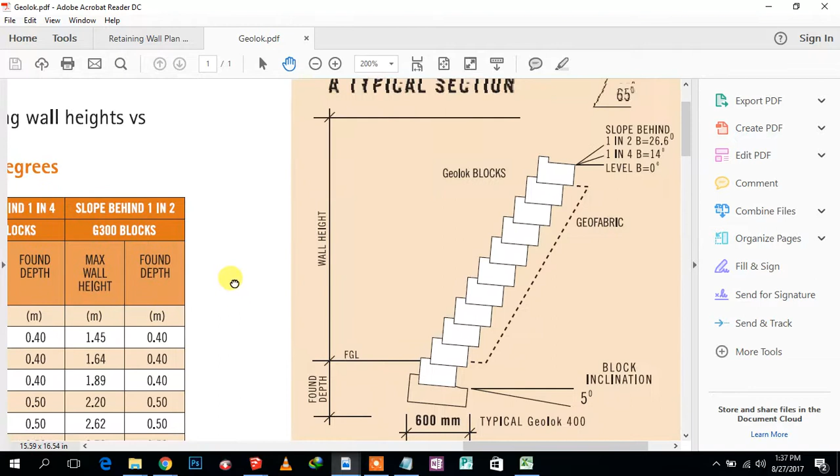So let me take you through the course. What I'm basically going to do is take you first to the manufacturer of the block. They have specifications. Let me just take you to the page.

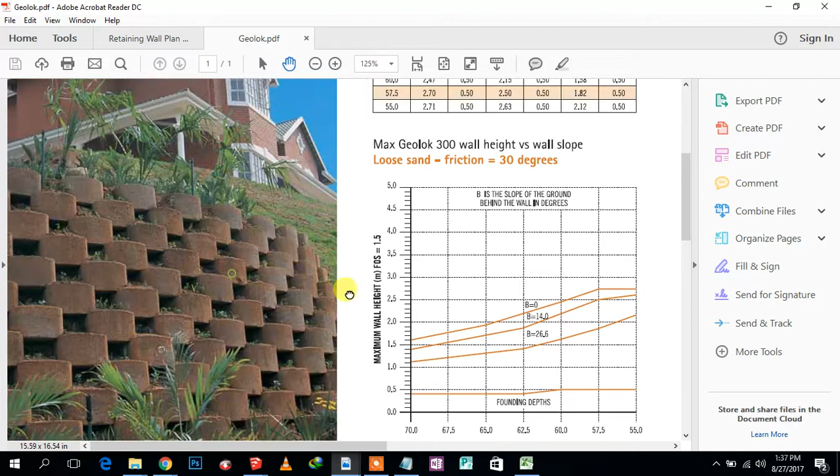First of all, is this picture that you see. What they actually decided to do is begin by showing a portion of a completed wall with the same blocks that we are using. So this is the block you can see in this picture, and the house is there with the green roof. This is somewhere in the estate down in Mount Edgecombe, in that village there, with houses that look similar, particularly the roof color. So then they use the same block.

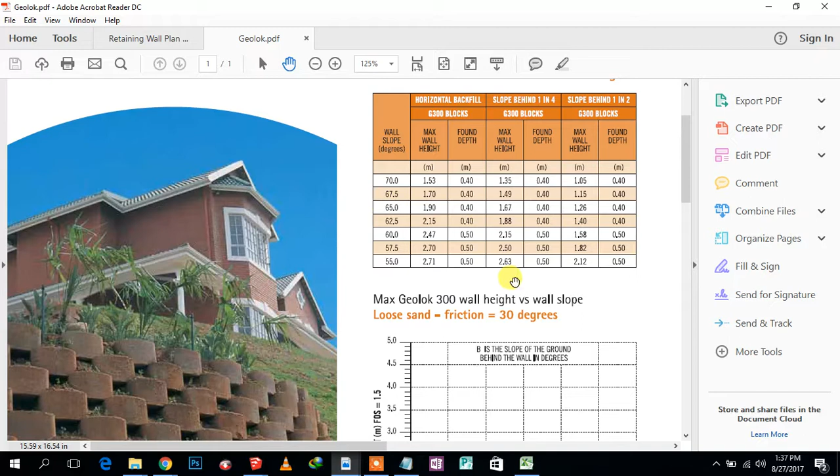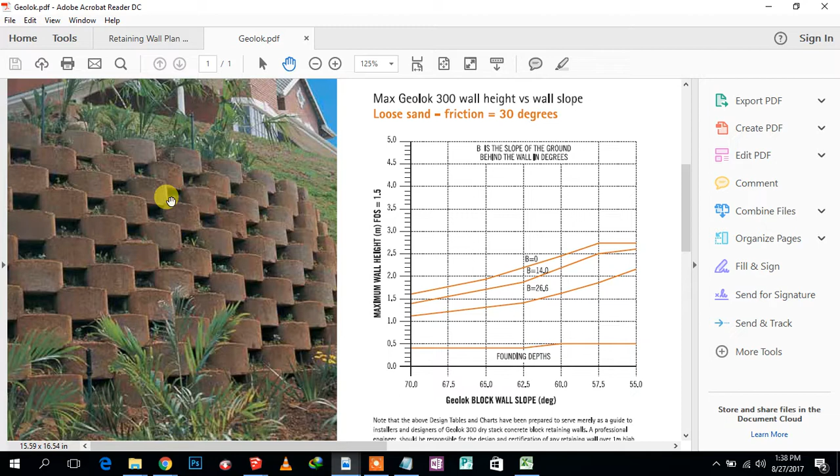You can see that this is the wall, a completed one, with all the inclination into the bank, the Geolok 400. And can you see the greenhouse, the grass, and the plants and all that you might need to do when the wall is completed. So let me take you to the page now with all the technical details.

Number one is the inclination. The inclination here is the wall is going up at 65 degrees. That's the slope of the wall. And there's a Bidim cloth there just behind the wall, which I have on-site already.

Now can you see that the wall, as it goes up, it's not straight, like for instance how this line is being drawn. It's very straight, and look at the wall, and how it's leaning into the bank. So if I were to draw another straight line in front of this one, you could see that it goes at such a sharp angle that a V shape gets formed. It means that land is staying in the air, not benefiting from that land.

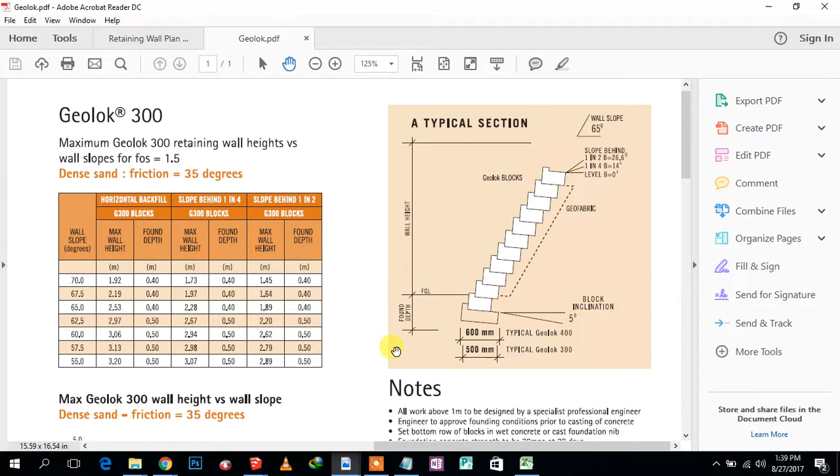So what I've tried to do is come up with another drawing. Let me take you to my own drawings. I wanted to give you a full picture that as a contractor, as a builder handling this project, my ability is to visualize the completion whilst the construction is in progress. So I have already visualized how it's going to look after we've successfully completed the wall.

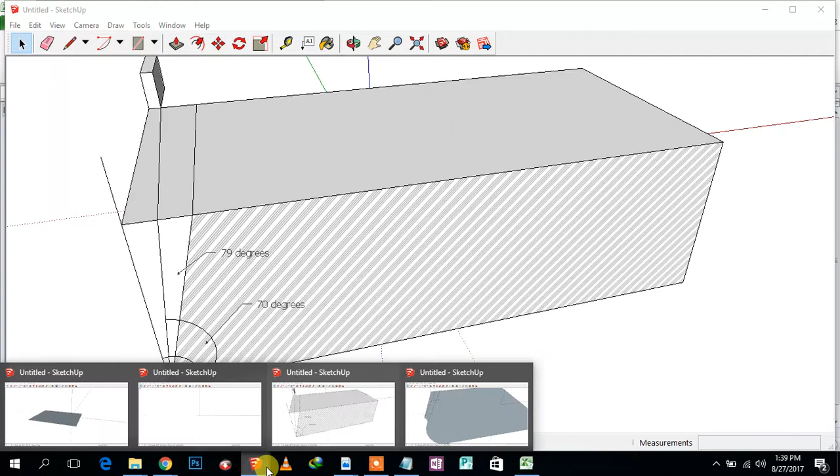Currently, because you emphasized that you don't want to lose any piece of the land, that's where your main concern is. So let me explain this. Can you see the shape of this thing? Let me explain to you what's going on in this drawing here. Let me zoom out, assuming that this is our concrete boundary wall with your neighbor's wall, and this is now the shape of our wall.

We curved in because we couldn't just start on a straight line, so we curved in so we could get enough space, and we could retain part of the bank on a curve. Initially we were going straight, and we were going to end up at this position here, approximately 1.68 meters from this pillar, from this existing wall that's recently been built. So that was going to be a huge V shape.

So what we've done is we've come up with a new design yesterday. We curved the blocks to form this curve again, so there are two curves forming a complete S shape. So basically now we are very far from where we were. We've now gained almost this gap, which is approximately 850 millimeters.

So now as we go up, we're not going to be starting deep into the bank. We're starting a bit forward, close to the neighbor's boundary line. Now I have also done some calculations to show you that. Basically what we have here is the height of the wall — we are going pretty high, 7.5 meters. I think so far, from the deepest point, we've retained about 2.5, if not 3 meters already. So we still need to go about 5 meters up.

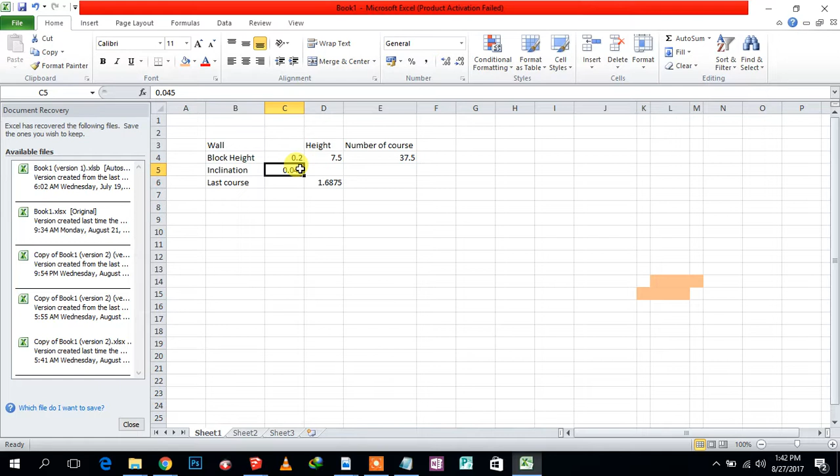So if we are gonna go up 37 courses, and each block is about 60 mils, each time we lay a block we are going 60 mils into the bank. By the time we put the last course, this means we are going to go about 2.25 meters. That's too wide, that's a lot of space that you're going to lose.

But you need to sit back and relax, you don't have to stress about that. What we've done is reduce the lip size to at least 0.045, so that you can be left with at least 1.6.

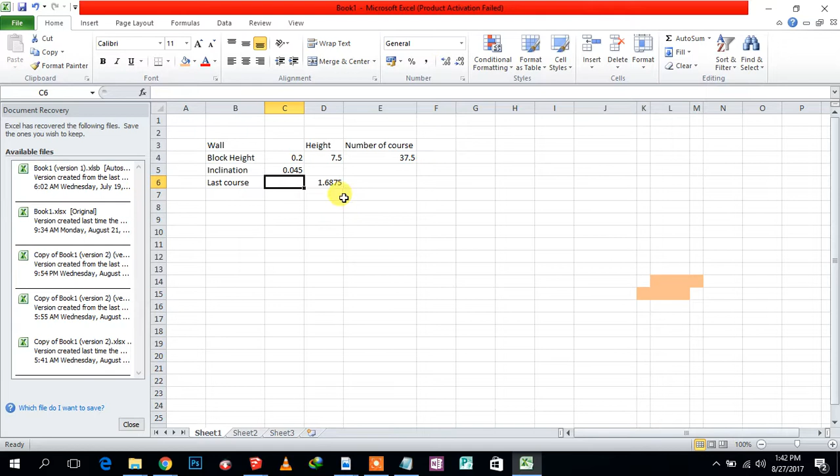Let me take you back to that diagram. Since we've gained this 850 now, it means we are starting from here. So now I have to subtract this 850 from this 1.68, so it's no longer gonna be 1.68 - you might expect to be within a range of 700 mils, or the size of a block only. That is gonna be the V shape between the wall and the retaining wall.

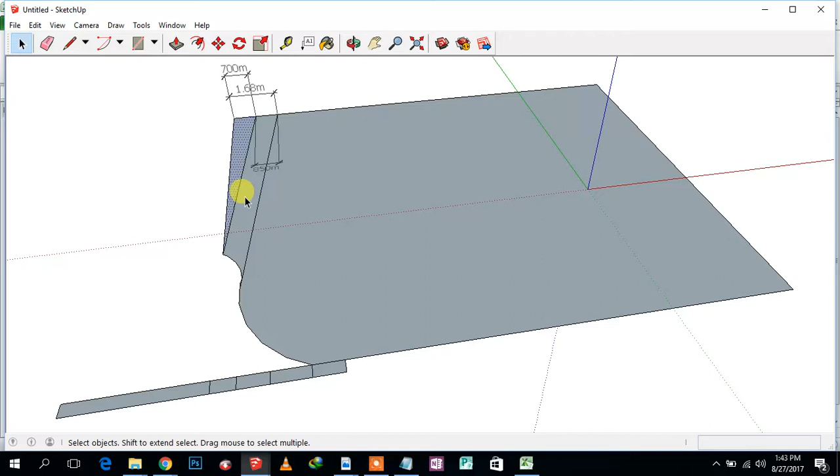So that's why I'm saying, it's actually good that we curved this area to get this space. Otherwise we were going to lose all this space, plus this space that was going to be a very huge space. So yeah, that's what I've ultimately decided to do.

Let me take you to another drawing, although this has nothing to do with what is going on in the house, but there's so much similarity and commonality. This is another specification we were asked to draft a bill of quantity from, for another fellow homeowner. The bank size was almost like the height we're dealing with at your house, 7 meters up, because there is footing. You can see it was 6,849 millimeters, or 7 meters, because there's 400 in the footing.

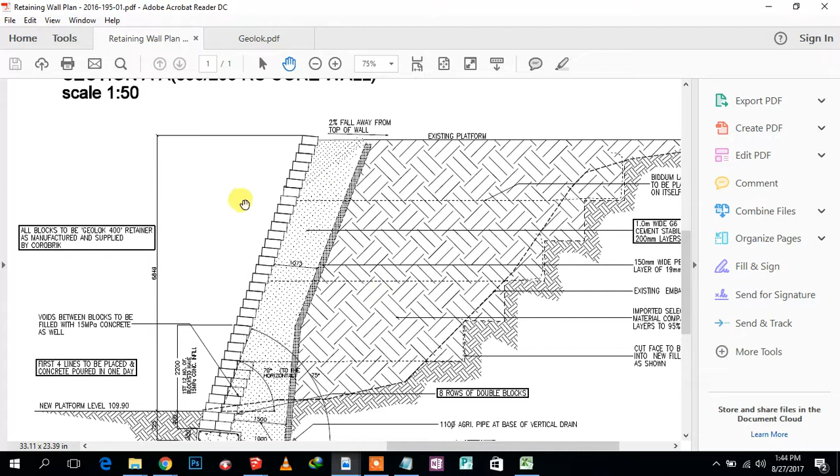The engineer specified that all blocks should be Geolok 400 retainer, manufactured and supplied by Corobrik. So basically that's what we are doing, using the same block to retain the kind of bank we're dealing with at the house. Everything we're going to be doing - the Bidim cloth we've got, the drain pipes we've got.

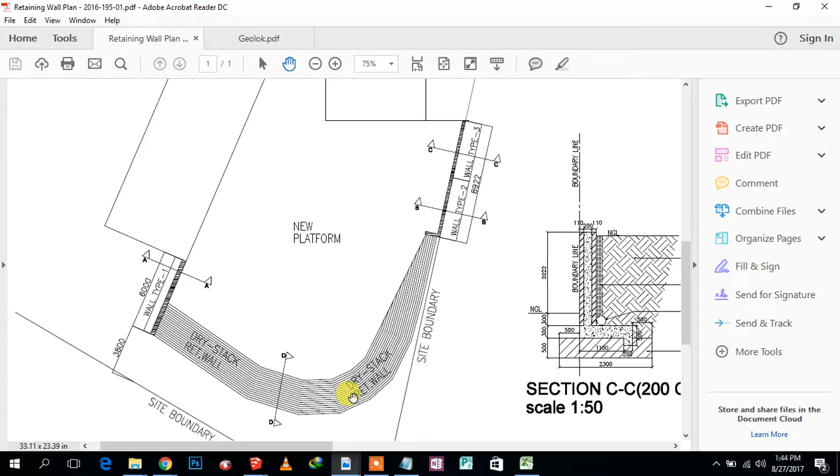I want to highlight this - I'm not sure how you're going to comprehend it, but I'll try to make you get a full picture. The wall was also a dry stack retaining wall, right? And where it was ending on the corners, this was going to be another kind of wall - a core wall. It's a concrete wall, CC, as you can see, and there is another CC.

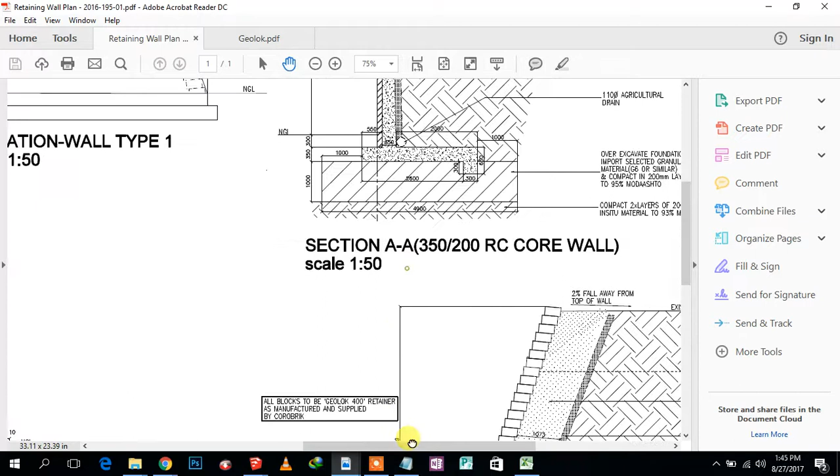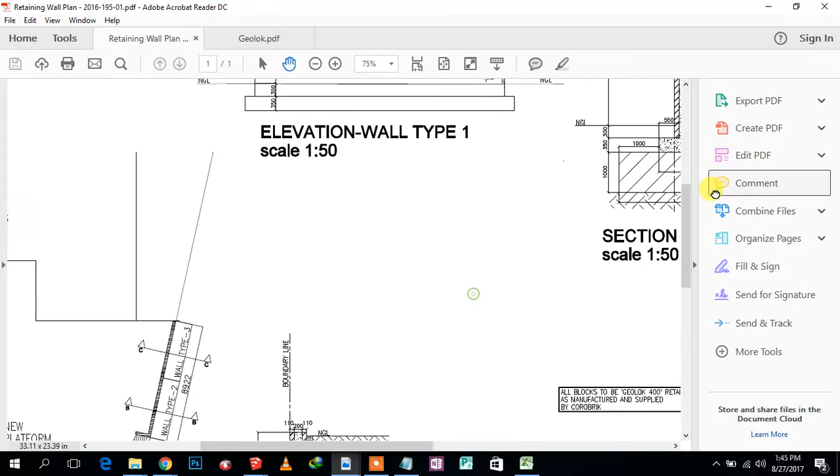AA, can you see this AA? CC, there should be BB - yeah, there is BB, you can see that this is BB. They are concrete walls, core is concrete wall. So now you see these walls here, BB and CC and AA, they are concrete walls on the ends to support.

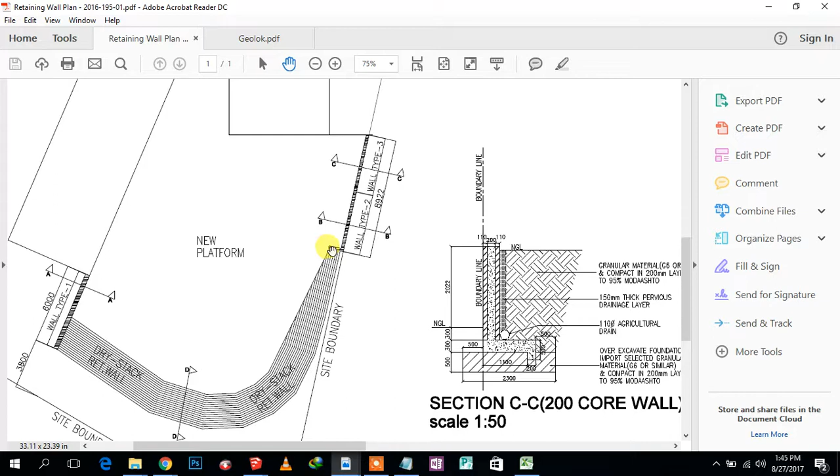Now look at these ends here. This one was actually L-shaped to cover up the gap where the reinforced or dry stack retaining wall and the concrete wall meets. There was going to be a V shape, so the engineer specified that we should extend this concrete wall so that gap gets covered. So that's what I wanted to show you.

Okay, back to our diagram. What I've also done - I think I explained already - is we're not gonna go at 70 degrees. It's better to make it more standing forward, like 17 degrees, so that you don't have to lose all this space. This will be the wall, and that will be the back view, and probably the bank is somewhere here, because there's a huge gap between the bank.